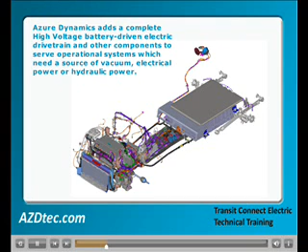The Transit Connect Electric is based on a chassis from Ford Motor Company, which is prepared with most major chassis items and operational systems, but with no source of propulsion. Azure Dynamics adds a complete high-voltage battery-driven electric drivetrain and other components to serve operational systems which need a source of vacuum, electrical power, or hydraulic power.

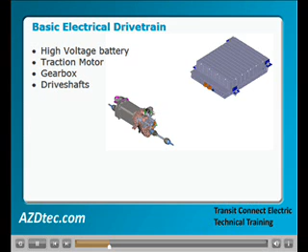The basic electrical drivetrain consists of a high-voltage battery, an electric traction motor and controls, a gearbox, and drive shafts to power the front wheels of the vehicle.

The powerful electric drive motor is both a motor and a generator. In normal driving operation, the motor receives power from the high-voltage battery and drives the front wheels through the gearbox and drive shafts. When the vehicle is slowing down, the front wheels turn the motor, which is electrically switched into operation as a generator.

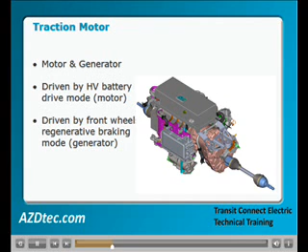The drag created by the rotation of the generator by the wheels is called regenerative braking, similar to the engine braking found in a conventional vehicle. Along with assisting to slow the vehicle and minimize the use of the vehicle brakes, this also serves to send high voltage back into the high voltage battery.

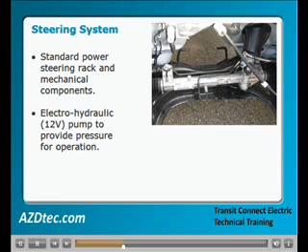The steering system on the vehicle is similar to that of a conventional vehicle. It uses the standard power steering rack assembly and mechanical steering components, but uses an electro-hydraulic pump to provide pressure to the power steering rack.

The braking system of the vehicle is also similar to that of a conventional vehicle, but uses an electrically driven vacuum pump to provide vacuum to the power brake booster.

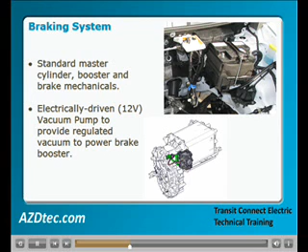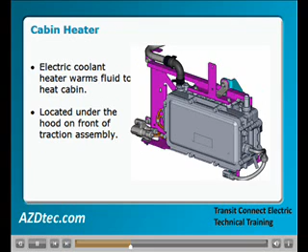Since there is no internal combustion engine to provide a source of heated coolant, the Transit Connect Electric has an electrical coolant heater mounted on the front of the traction assembly under the hood, which provides the source for cabin heating. While the high voltage battery, or ESS, is located under the rear cargo area of the vehicle, and there is cabling and cooling lines running below the floor pan, most of the components are housed in the forward part of the vehicle or under the hood.

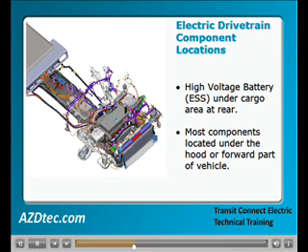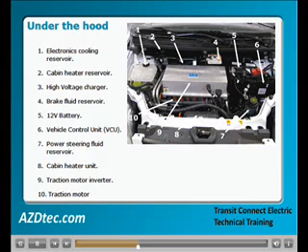9. The traction motor inverter, and below it, 10. The traction motor. Information on these underhood components and procedures for checking and filling fluids are found in the Owner's Guide supplement.

The instrument panel indications are different than in the standard Transit Connect. On the left side, a large range gauge is shown, which indicates the approximate number of miles that can be traveled on the existing state of charge for the high voltage battery.

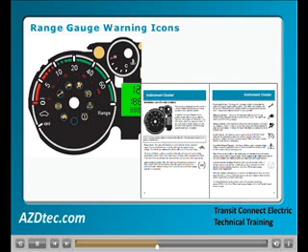Arranged on the face of the range gauge is a series of icons which are warning lights for various vehicle functions. Operation of these is shown in the owner's guide supplement. To the right of the range gauge is a temperature gauge. This indicates the temperature of the cooling system, which regulates the temperature of the major electrical drivetrain components.

On the right side of the instrument cluster, you'll find the speedometer and another set of icons which serve as warning lights for other functions. These are also shown in the owner's guide supplement. To the left of the speedometer, you'll find the high voltage battery state of charge indicator. This indicates high voltage battery voltage.

The operation of the vehicle is initiated by using the ignition key. The key has 4 positions: off, accessory, on, and start. The on position is the normal driving mode and is also used when the vehicle is on the external charger to allow the use of the environmental systems as necessary.

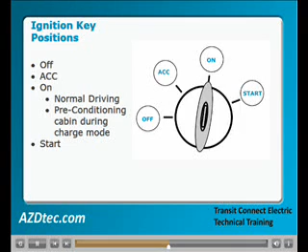The start position is what initiates the high voltage system for driving operation. Starting the vehicle involves inserting the key, turning to the on position, and then to start.

As the vehicle high voltage system is initialized, the range gauge moves up from zero to indicate approximate range, and the state of charge indicator moves to show the current state of charge. The vehicle is now ready for normal operation.

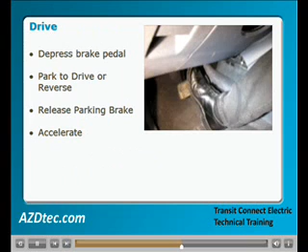To drive the vehicle, depress the brake pedal, shift out of park into either drive or reverse, release the parking brake, and apply pressure to the accelerator pedal. Driving the vehicle requires no special techniques.

With the vehicle in the D position, the vehicle will move forward and speed will be proportional to the amount of accelerator pedal movement. Along with the lack of engine sound and unique sounds of the traction motor, the only difference which will be apparent to you in driving the vehicle will be that there is no gear shifting.

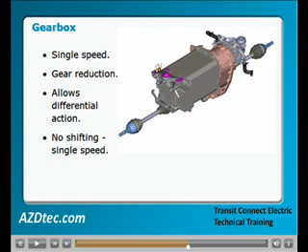The gearbox in the Transit Connect Electric is a simple, single-speed unit which provides needed gear reduction and differential action to allow the front wheels to turn at different speeds as you go around corners.

Movement of the gear selector control in the Transit Connect Electric into the 1 or 2 positions does not provide any change in gearing or acceleration. Normally you are operating with the selector in the D position.

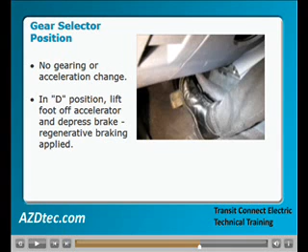When you lift your foot from the accelerator and make any brake application, the VCU will signal to create regenerative braking by creating driveline drag from the generator mode of the traction motor.

If you move the gear selector out of the D position into either 2 or 1, there is a change in the signal sent to the VCU.

When you are descending a hill or simply want more regenerative braking, you can move the gear selector down to the 2 or 1 position and command more regenerative braking and high voltage battery charging. This will not only minimize the use of the vehicle brakes, but will contribute to vehicle range by sending more charging voltage to the high voltage battery.

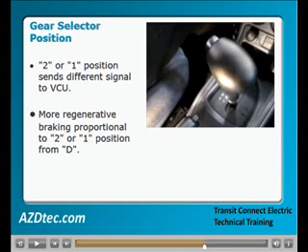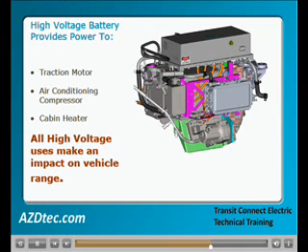The Transit Connect Electric is an all-electric vehicle powered by the high voltage battery. Some vehicle systems like air conditioning and the cabin heater system use high voltage as well. This means that vehicle range is affected not only by driving the vehicle, but by consumption of power from these high voltage systems as well.

12-volt systems on the vehicle include the expected lights, wipers, horn, heater and cooling blower, and electric radiator fans. Specialized 12-volt equipment includes the power steering pump and vacuum pump.

All 12-volt items which are in operation and consuming power will take power from the 12-volt battery. This is automatically charged with a special DC to DC converter on the vehicle, which is powered by the high voltage battery.

Maximum range for vehicle operation can be ensured by minimizing the voluntary use of 12-volt systems unless they are needed for safe operation. In addition, light acceleration and moderate vehicle speeds will minimize the rate of discharge of the high-voltage battery. Whenever you stop and are going to park and leave the vehicle, you should follow the procedure suggested in the Owner's Guide supplement.

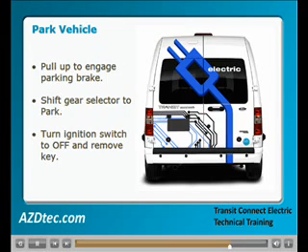First, pull up and engage the parking brake. After moving the gear selector to park, turn the ignition key to the off position and remove the key from the switch. At the end of the daily drive cycle, you will want to allow the vehicle to be charged.

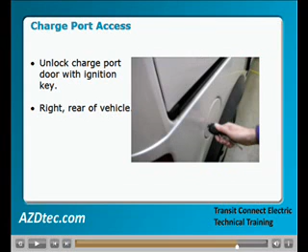After removing the key from the ignition, walk to the right rear side of the vehicle and use the key to unlock the charge port door. This is the same door that is used as a fuel filler door on a conventional Transit Connect. After opening the door, release the catch to allow the charge port cap to open.

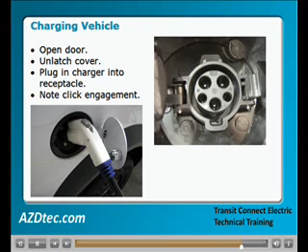Now, plug the charger plug into the charge port receptacle and note the click as proper engagement is made. With the charging station activated and plugged into the vehicle, you will note a flashing green LED lamp that indicates that the vehicle is charging.

The amount of time needed for a full charge will vary depending on the charging unit and the amount of discharge present in your vehicle high-voltage battery. In general, you will need 8 to 12 hours for a full charge with a level 2 charging station operating on 208 to 240 volts.

As noted in the Owner's Guide supplement, a red LED is provided as a warning for a charging malfunction. In addition, certain restrictions apply to charging under extreme cold weather conditions. If needed, the vehicle environmental systems with heating or cooling can be run during the charging cycle to ensure that the vehicle cabin is kept at a comfortable temperature.

This preconditioning can be accomplished by returning to the cabin, inserting the ignition key to the on position, and using the appropriate heating or cooling device. This should be discouraged under all but extreme conditions, since it will significantly lengthen the amount of time needed for high-voltage battery charging.

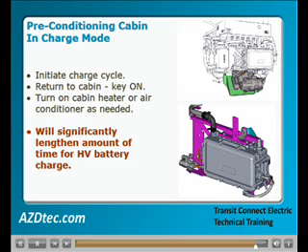This concludes the presentation portion of this course. There is currently no examination given for course completion.